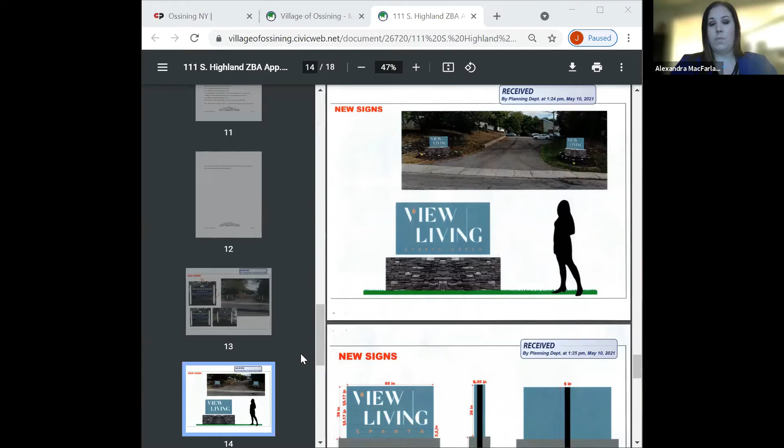In that case, I think we can just move forward with what we have. Unless you disagree, Marlene.

I think that, considering everything, my recommendation would be that you do move forward. I think the applicant has had quite a bit of time to work on this application. I understand they've changed the individual there, but they didn't reach out to us. Nobody's reached out to us in the past two months about this, and our first correspondence with them was today, saying they wanted to move forward with the application request. The request for two signs, or for one sign that was sort of perpendicular to the street, was what was requested before. They didn't provide that. Obviously they have a request in front of you. There's no harm in just considering it today as it is, since they've had a couple of months to work on this or withdraw their application or request an adjournment. They didn't. I think it's safe to assume this is what they want.

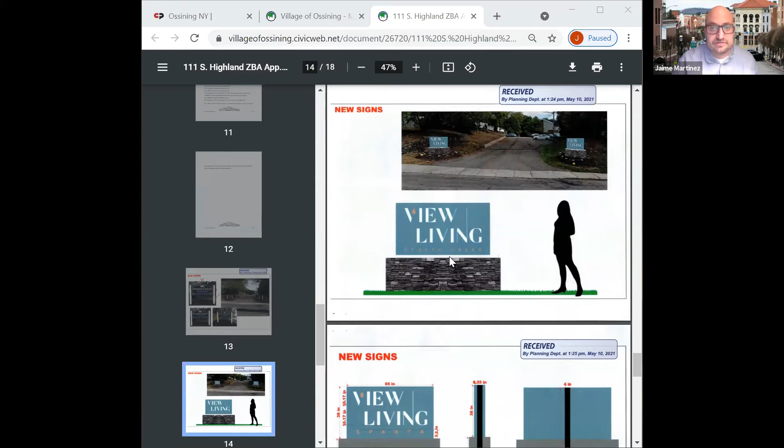So if the signs were not built yet, were these signs put up by your company already? No? So I'm sorry, I don't quite understand the question. Are these brand new signs pictured? Yes, they tore down the old signs and replaced them with the new signs. I do have a picture of the old signs here. Great, yeah, that is the old sign, which was two posts in the wall. Yep, that's before my time.

The first thing you had said was that the company, when it assumed ownership, didn't change anything, but it actually did change the pre-existing structure. It took out the posts and sign and installed the stacked rock signage with the feature on top, but there's no need for the second sign in my opinion. The need is self-created because the angle of the sign was predetermined by the designer or architect, the management company. If it was perpendicular to the road, there actually wouldn't be a need for that second sign. I'm familiar with the placement - the more southern sign is probably the only one that could be perpendicular based on sight lines, but that's for an architect to decide. That's kind of where I'm standing on this.

So I think, to Alexandra, just to let you know, we asked last time if there was any way they could do one sign, with renderings or drawings, anything that could come before us to give us an idea of what it would look like. Again, they went from two posts and a small sign to what looks like two permanent concrete signs. So there was just a little bit of change - there was a lot of change on our part. So we were just asking for another look.

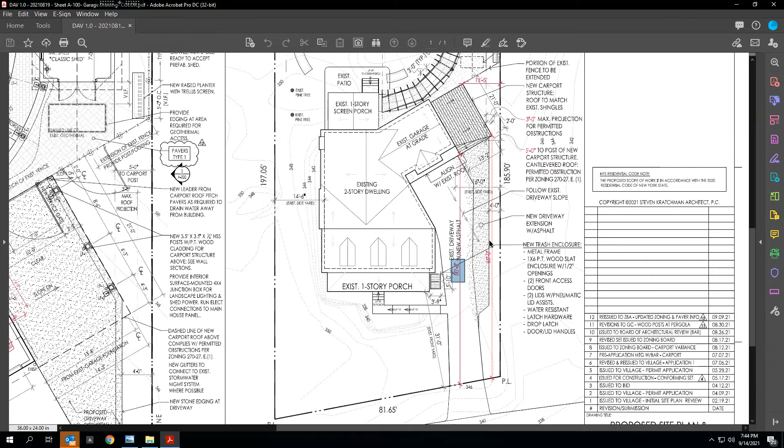The worst condition is only a point and not a line or a plane. If you could just put your cursor on that—the worst condition is a point at 88 feet with the 5'6" setback.

But then it gets better and better. It goes back to 13 feet at the back corner, and then 13 feet or some version of that at the front corner where it meets the building. So it's a lot different—it's set back already 8 feet. It's a point and not a plane.

And we think that if we were to build the as-of-right scheme, which is detached, with let's say a de minimis 1-foot separation, the carport would get a little smaller because we can't encroach any more than the 5 feet for an accessory structure—because that's what it would be called, no longer a primary structure connected to the principal structure, but an accessory structure.

But if we were to do that, and we can do that as of right, as we understand it, we think that the look and feel from the street will not be attractive at all.

Now I know that if we get past your review and get the opportunity to go to the architectural review board, they'll be able to see a rendering. But I'll tell you the ingredients of the rendering, which you can start to see in the roof plan here—this new structure is going to match exactly the existing architecture.

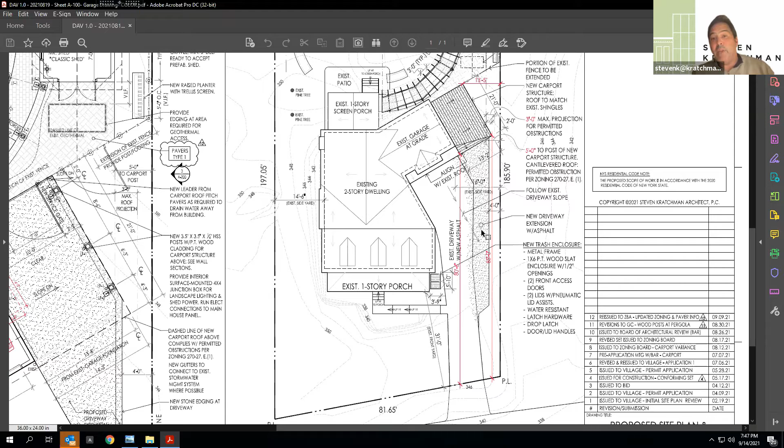Gregory and Fred, can you help me with any points that I might have missed? I think you can make a point—obviously the rendering. Okay Fred, don't talk, text me or something. Can you hear me? We can't hear you. No? Okay, sorry about that. Gregory, do you know whatever Fred was trying to say? I don't. Jaime, do you know what you're talking about? I don't know.

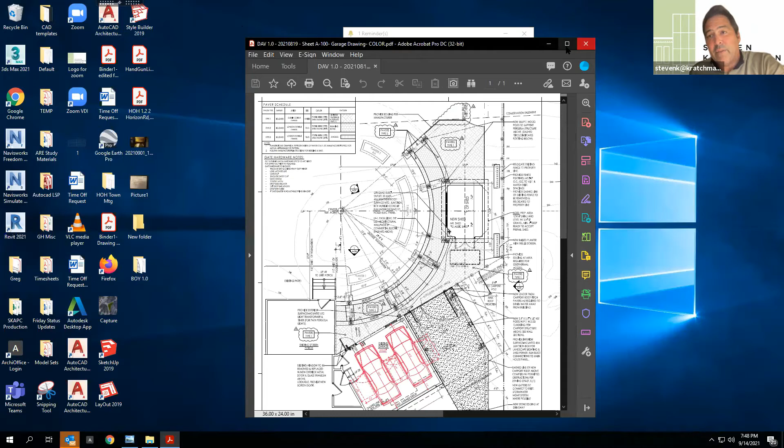Okay Gregory, do you think there's anything else I should address, or should I ask the board if we're ready for some questions to clarify things? I'd be happy to explain the rest of the project quickly and the other things happening in this plan, if you need that.

I know there's a question about paving materials, I could speak to that. There's a shed we installed without a permit that doesn't require one, and a pergola that's almost finished in the back, which is a freestanding structure and didn't need a permit.

My question is, the existing garage is staying where it is? Yes. So there'll be a garage and a carport? Yes.

The garage has the master bedroom and bath above it. Probably if it didn't, it might have originally been detached and we wouldn't be calling it part of the principal structure. But like I said, the two-car garage is advertised as 2 cars, but it's deficient.

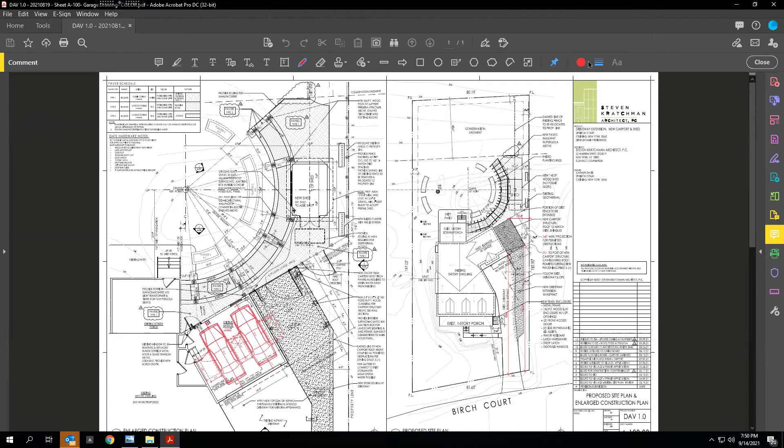Jaime, can I ask, do we have a street rendering, a view of the property from an aerial view? Street view or aerial view? I'd like to see both, really. Okay, we can do both. Gregory, you want to do that?

We can show first the cover page of the presentation. There you go, can you see that, Marlene? So, but this is the way it looked before the pergola and before some of the other work was done?

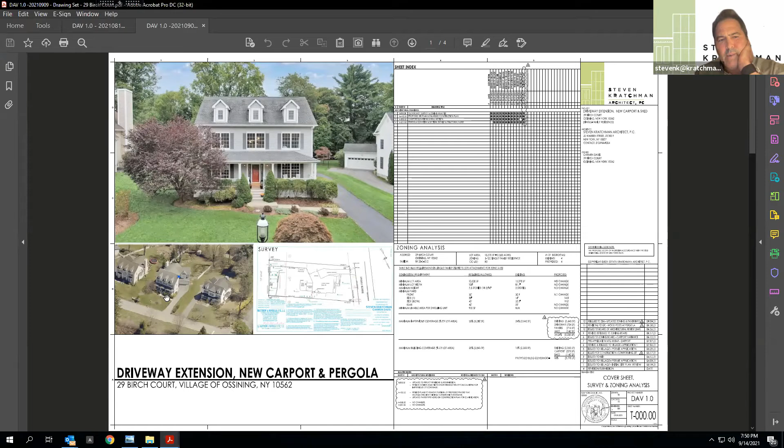You can't see the pergola, it's not visible from the street, not from that angle. Yes, zoom in on that a little bit. Gregory, you want to draw the pergola in on that as an overlay there, a little half circle? Let's go. Other way. Undo that.

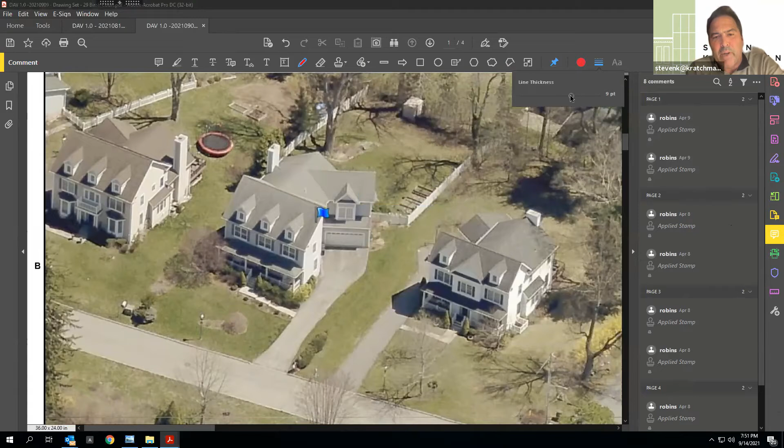And the fence, Marlene, the fence you see there is a 10-foot existing fence that was removed as part of this project and replaced with a fence on the property line, 10 feet in the other direction. The pergola is something like that arch, and there's a shed in there as well.

So now you have a shed back there, a pergola back there, and now you're asking for a carport adjacent to the side where the garage exists, where that little white fence is in the front.

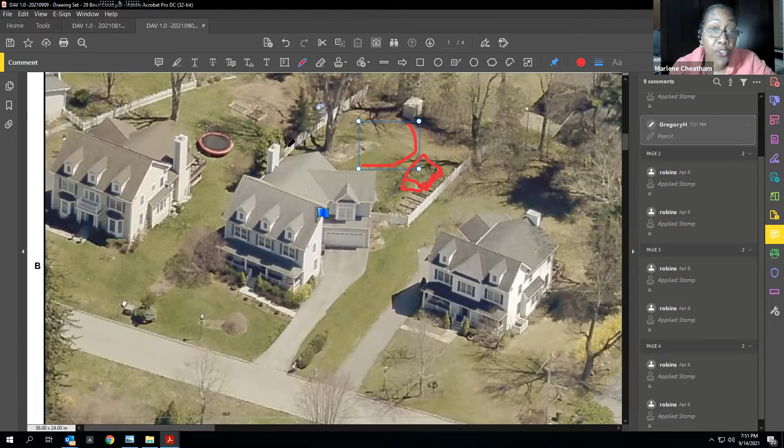Well, let's go to the plan now, if you don't mind. Is that okay, Marlene, if I go to the plan because it shows it? Absolutely, thanks. Not that plan, go back. Let's look at the right-hand drawing, Gregory. If you can enlarge that to full size.

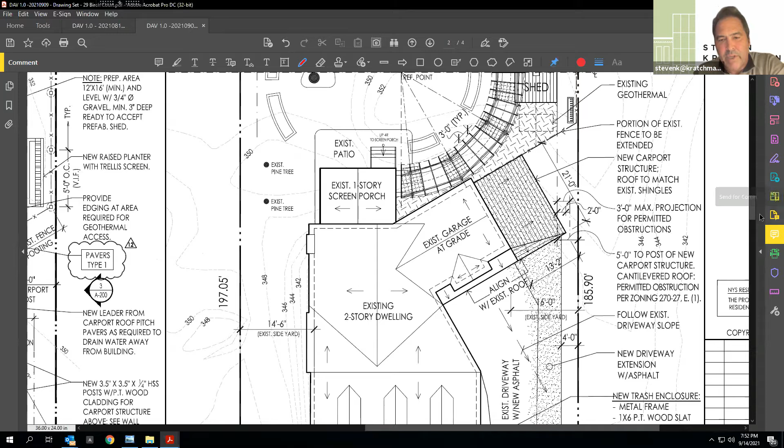Okay, but come back down a little bit. You're getting... yeah, and reduce it 10%, 15%. Okay, so we are...

We are widening the driveway, adding an attached proposed carport. There's an existing screen in the back, and a small shed, the 10x16 version, 10x14, and there's this pergola that's open to the sky, with some raised bed planters as well. The owners like to garden and spend time at home, and that's what they want.

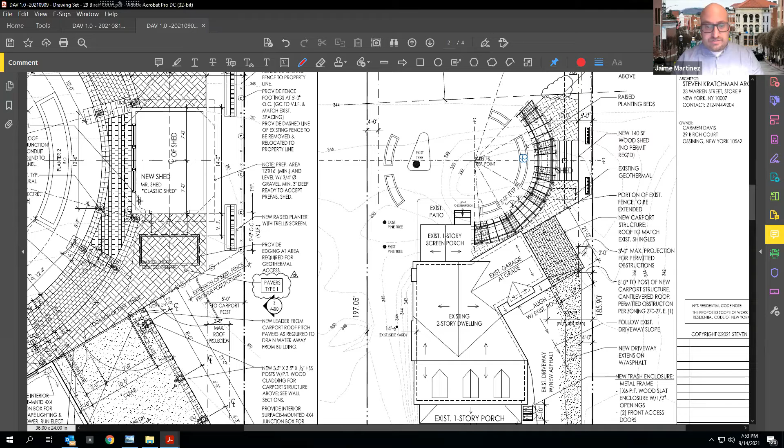And so with all of this, we're not exceeding the lot coverage, which is 35%. If I can, I'm going to show 34% right there. Sure, I have pictures, I went there today, so I'm going to share those pictures.

So this is an image looking at the back of the house, from the back of the house. This is the pergola structure, you can see that there on the left. This is the other side of the pergola here.

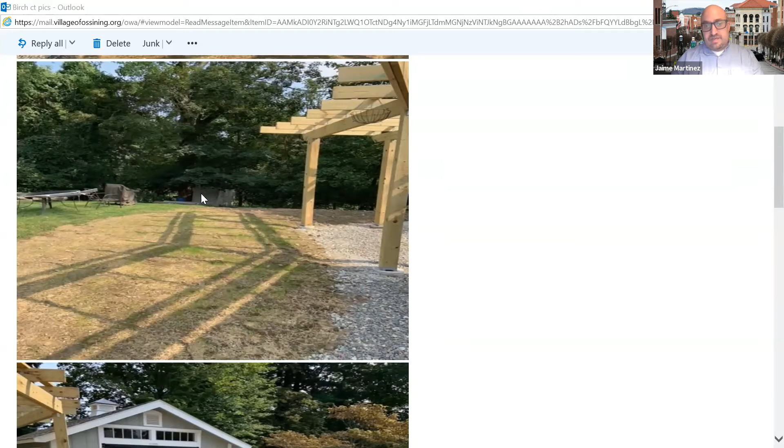This is an old small shed, about an 8x8 plastic shed in the back. This is the new shed they placed in, about 10 feet by 12 feet, which is under the code. Both of these don't require permits just because of what they are. The pergola, Joe can explain why that doesn't require a permit. The shed is under 144 square feet, so that's why that doesn't require one either.

This is kind of a view of the two of them together, a little farther out. This is a view from when I was walking up the block.

So you can see the pergola somewhat from the street. If the carport goes up, you probably won't be able to see the pergola all that much, but you might be able to see it as you approach, coming up Birch Court. This is the neighbor's yard here. To the right of the property, you can see there's a line on the side—there's a fence line that was built here. And then there's this silt fence that was put onto the property line of 29 Birch Court.

Okay, so I guess my biggest question would be if they're extending the driveway over and removing the grassy area, what does that do for drainage?

Well, if we have the option to, the drainage is governed by code requirements for pervious and impervious lot coverage, which has a 35% maximum on this property. Our calculations show on the filing that it's 34% if we use all impervious materials. The owners haven't decided yet if they're going to opt for some pervious pavers. They know about it, we've talked about it, but they're hard to get at the moment—many have stopped making them. They have the right by zoning code to have all impervious materials, but they're planning on doing attractive 3 or 4 color pavers underneath the pergola. Underneath the carport would be asphalt.

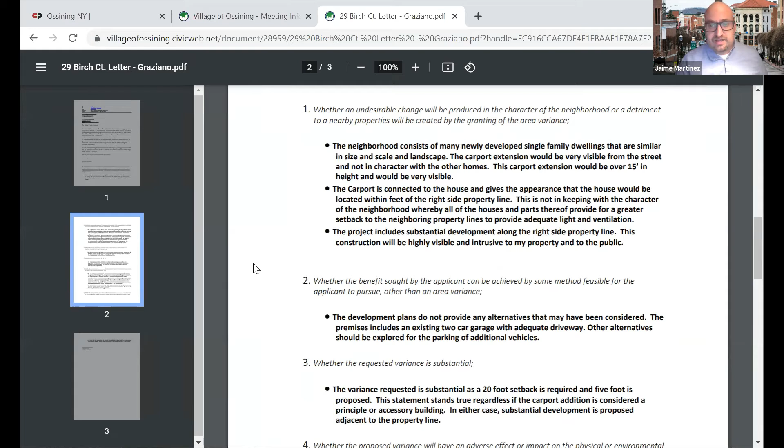Bullet 3, the project includes substantial development along the right side property line. This construction will be highly visible and intrusive to my property and to the public.

Two, whether the benefit sought by the applicant can be achieved by some method feasible for the applicant to pursue other than the area variance. The development plans do not provide any alternatives that may have been considered. The premise includes an existing 2-car garage with adequate driveway. Other alternatives should be explored for the parking of additional vehicles.

Three, whether the requested variance is substantial. The variance requested is substantial, as a 20-foot setback is required and 5 foot is proposed. This statement stands true regardless of whether the carport addition is considered a principal or accessory building. In either case, substantial development is proposed adjacent to the property.

Four, whether the proposed variance will have an adverse effect or impact on the physical or environmental conditions in the neighborhood or district. Bullet 1, the area of the proposed carport is situated on an embankment that grades sharply down to my property to the right. Accordingly, the embankment would be subject to erosion. My property would be subject to excessive surface water and groundwater flows.

Bullet 2, the project includes the construction of large impervious surfaces, including 1, the driveway expansion, 2, carport, 3, rear yard paved surfaces, and 4, shed and planter areas. These impervious surfaces are all upgradient of my property and provide for increased surface and groundwater flow. Plans indicate that there would be a connection to the stormwater management system where possible. This is unacceptable.

Point 4, the embankment between the existing driveway and the right side of my property line is already excessive and is subject to erosion and inadequate stormwater mitigation. By widening the driveway, this condition will only get worse.

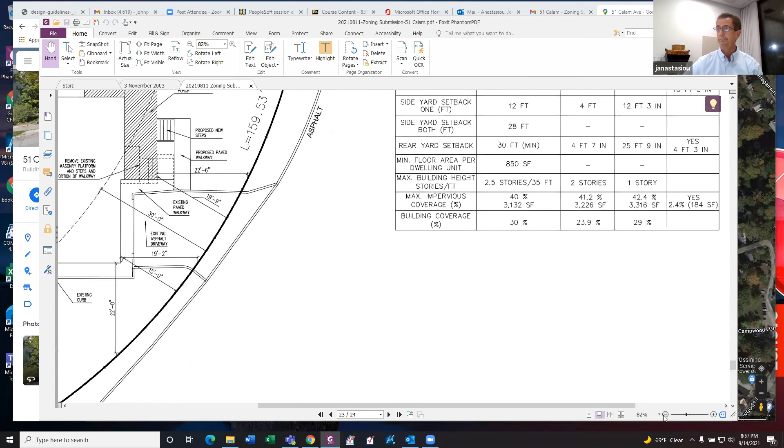So this is the existing house as it's currently situated. As you see, the lot is a quarter of a circle. It starts out on Calam Avenue, and as the road bends, it leads into Flavel Place.

The house currently has two entrances, one from Calam Avenue, right over here, and another entrance off of Flavel Place. The owner is seeking to give priority to one of the entrances as their main entrance, and at the other entrance, create a mudroom there to serve as a secondary entrance. So the owner is seeking to build a wraparound front porch and additionally build a mudroom in this location.

The way we're orienting our yards, the front yard is off of, as a corner lot, this is going to have two front yards. And because of the geometry, it's a curved lot, so the front yards are going to be off of both Calam Avenue and Flavel Place.

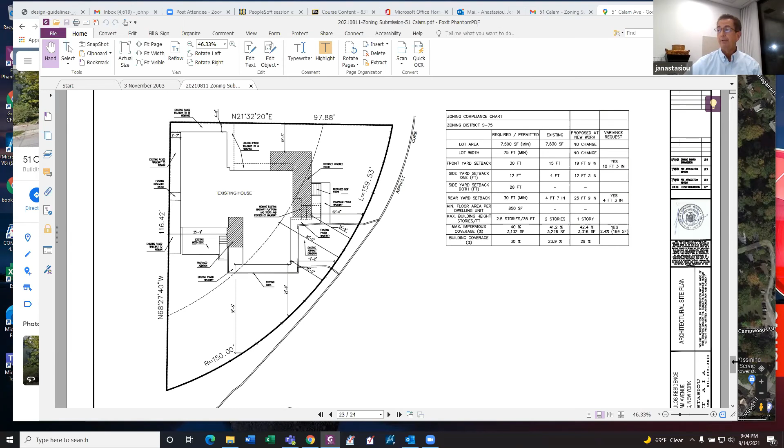I took the liberty of stating in my letter to the board, applying the five principles. I don't know if it's appropriate or not at this time for me to go through this, so I seek your guidance on this, if it's something that you want me to read or not.

So should I proceed?

I'm not sure if everyone had a chance to read through it, but I did see your explanation. So if there are any members of the board that would like to have it read into the minutes. No, it's fine, it's already part of the record. It's just a matter of whether you want it read into the video. I don't think it's necessary. Okay, so we've all had a chance to read it, so thank you.

You disappeared off my screen, but thank you. I believe if there's nothing else from you, or anything from Mr. Demetrios, I'll entertain anything from the board at this point, and then we're going to open the public hearing. No, there's nothing else from me. Nothing for me. Is there anything from the board before we open the public hearing?